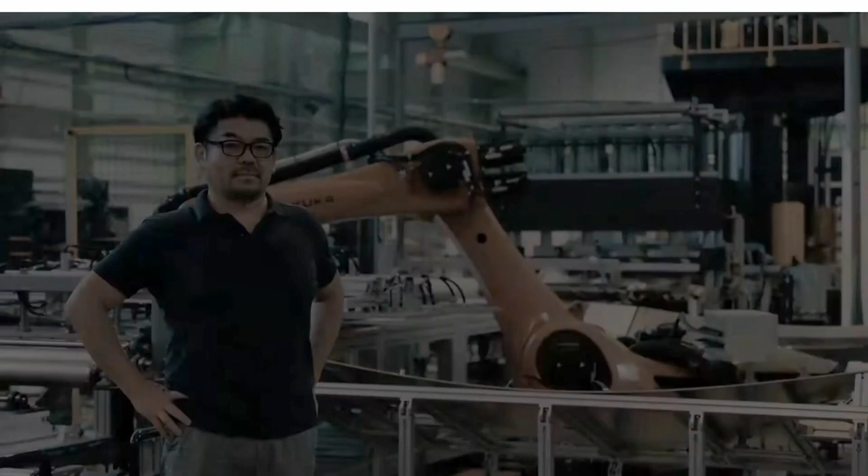This is a factory of MaruHachi in the Fukui region. It's a tradition of 3 generations, starting with the textile industry. In 1936, you will see here this young CEO, Toshi SUGAHARA, who took over a textile operation and is one of the pioneers in Japan for thermoplastic, but also for thermoset prepregs.

You see early on fabrication and knitting with glass fiber and carbon fiber, and now moving into thermoplastic composites. The CEO, Toshi SUGAHARA, will explain this in detail in a minute.

Okay, so I'd like to welcome Toshi SUGAHARA, the CEO of MaruHachi, who will give an insight of the family background. He's in the 3rd generation. The company started in 1936. He took over from his grandfather in 2018 as CEO.

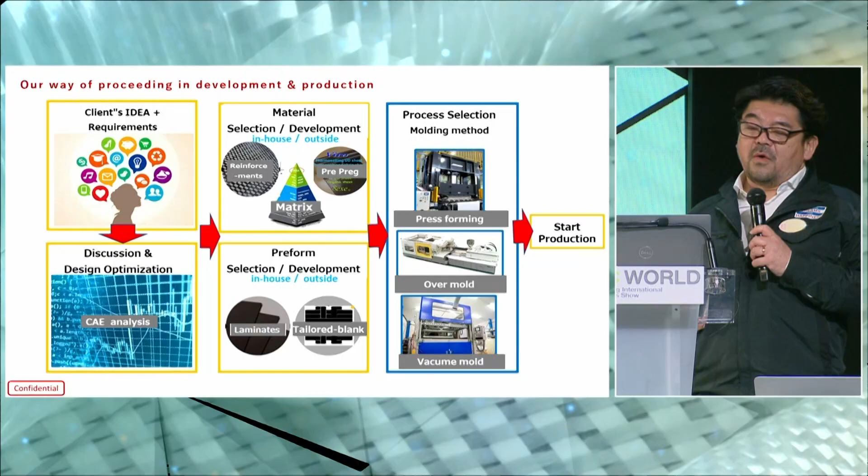Now, I'd like to introduce our way of proceeding in development and production in composite. So this is already you know very well, but I like to explain our flow of how we work with how we start the development and the production.

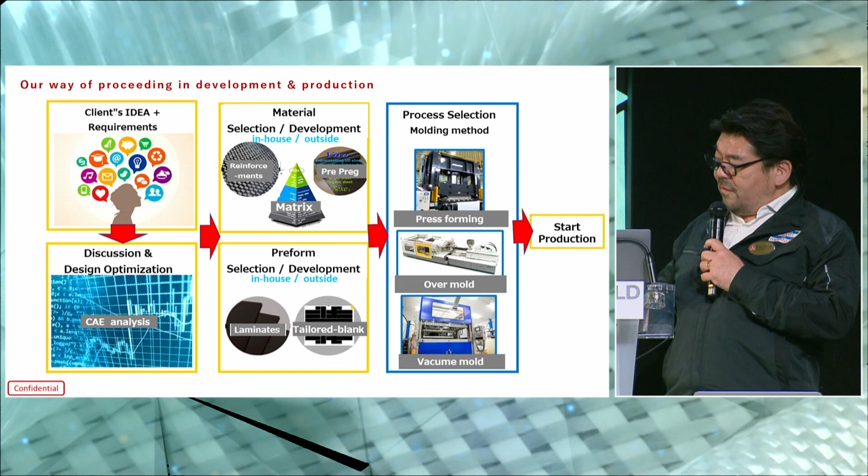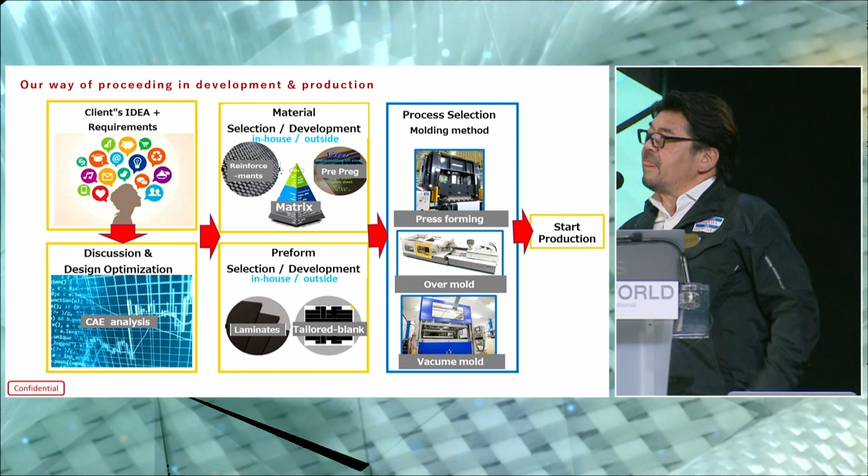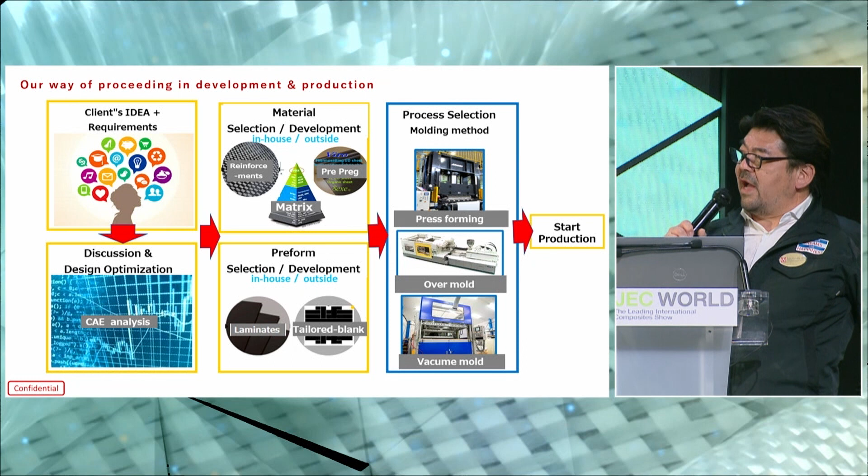Firstly, we get the client idea and requirements to think about. Then after that, we will discuss and also make some design optimization. Then we will come to the material to select, or if we don't have it, then we will develop. It could be sometimes in-house or outside.

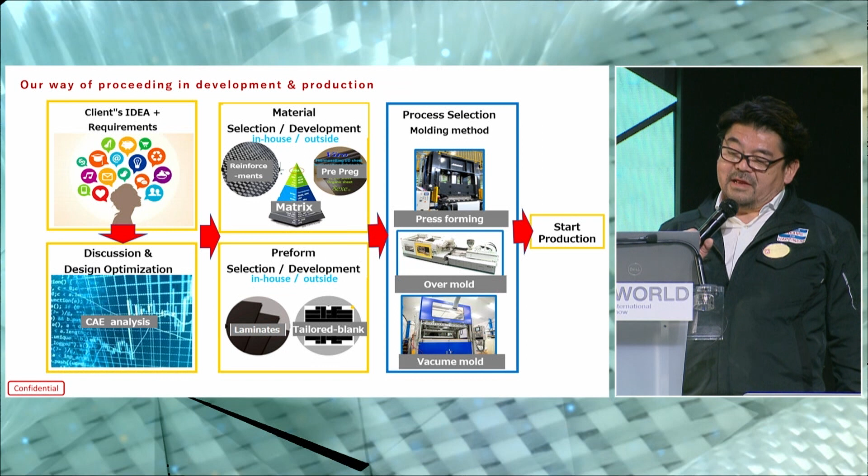And also preform, also select or develop in-house and outside. Then finally, we select the process from the lots of candidates. Then finally, we start production. This is how we work in the composite flows.

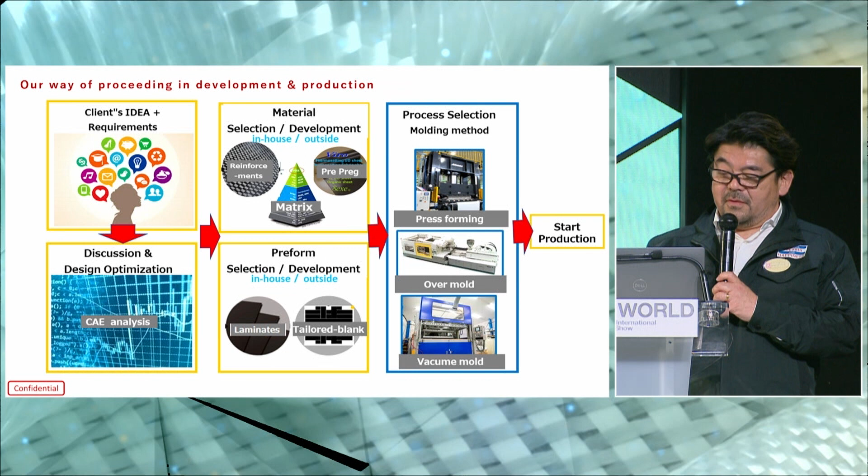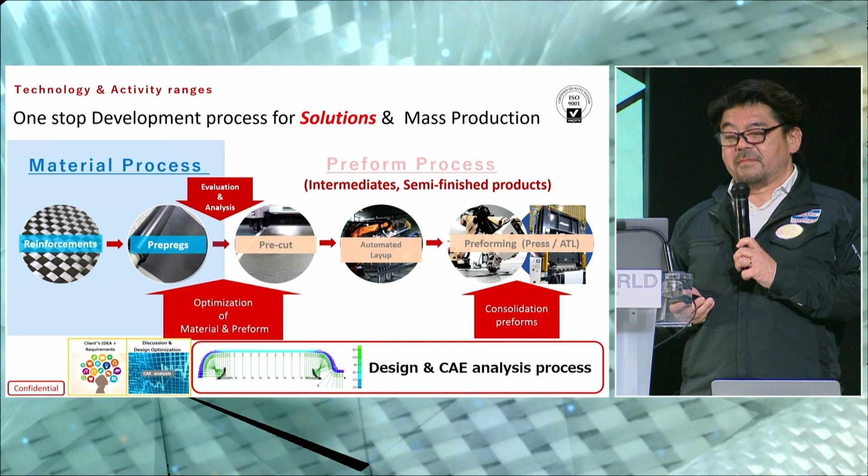Especially in this flow, we have 3 processes: design and analysis process, material process, and preform process. So I'll go into a little bit more detailed introduction of these three processes.

We have the CAE analysis process with the experience from the high pressure vessel, as we had the JEC award in 2014. So it's more than 10 years we have been working on the CAE analysis. And also material process, we have the ability of the reinforcement and also prepregs. Then we will make the evaluations and analysis on the material.

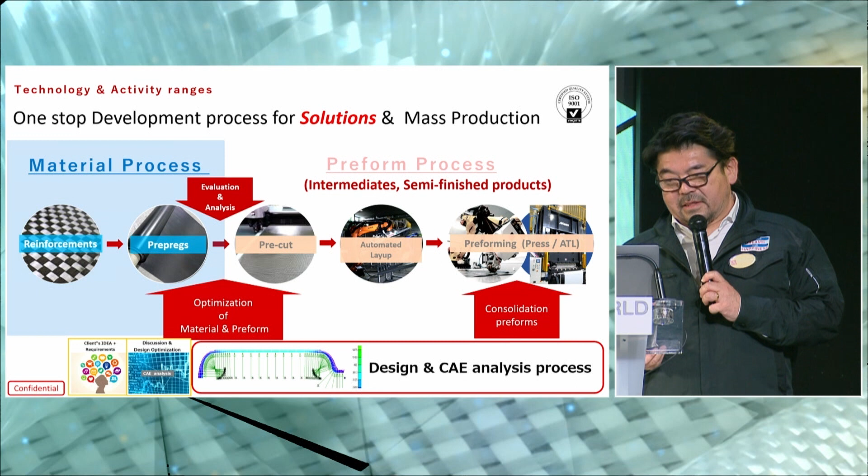Then preform, for example, like laminates or tailor blank. That's what we do. So it's like there is a one-stop development process. And then finally, we have also set up the ability for mass production.

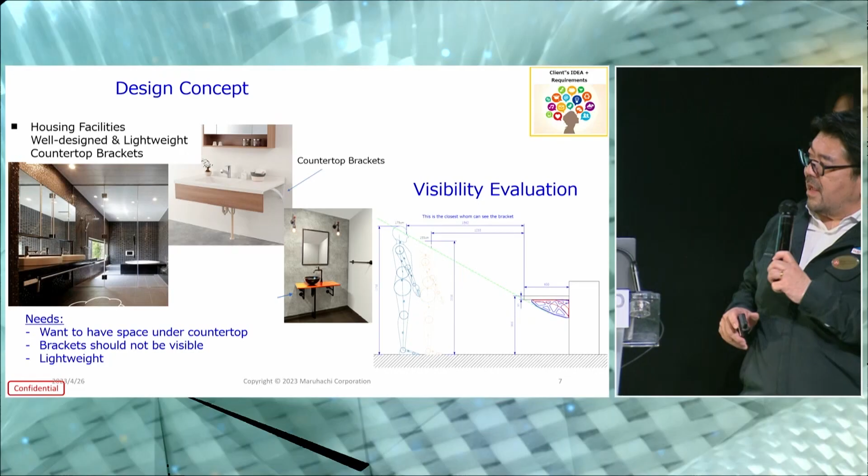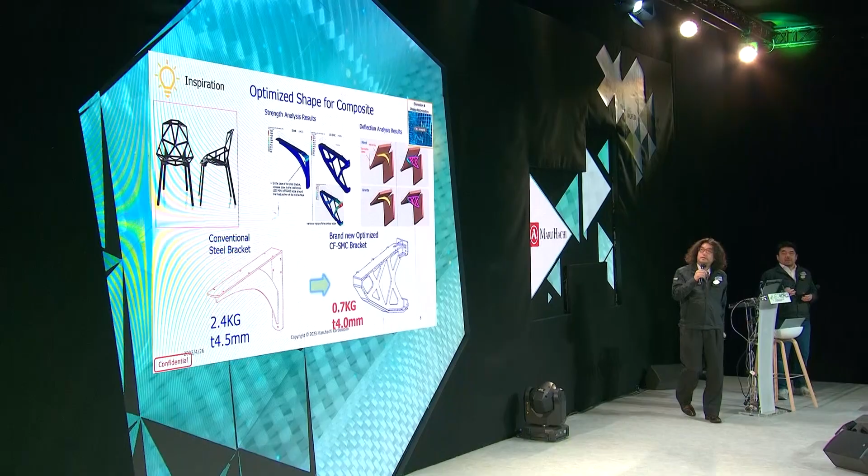Yes, here my colleague will explain this. Okay, my name is Hiro, R&D section manager of MaruHachi.

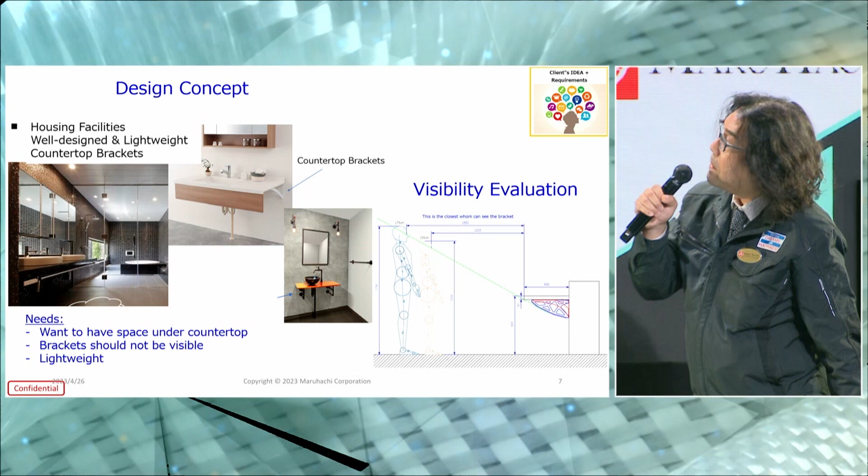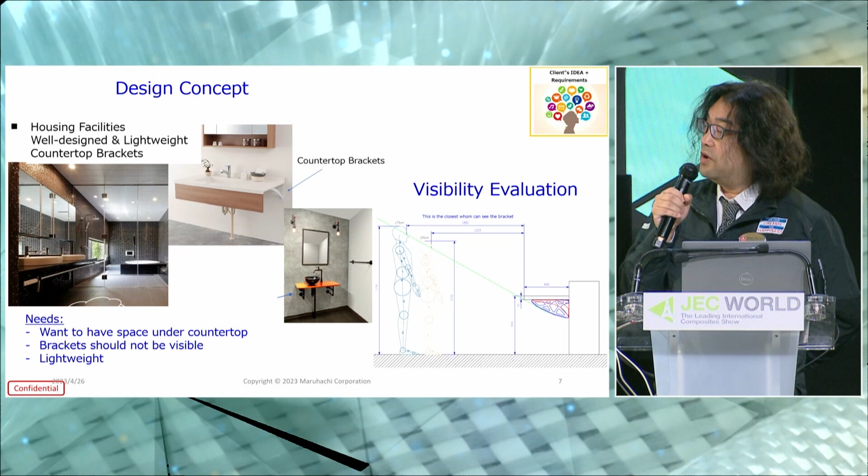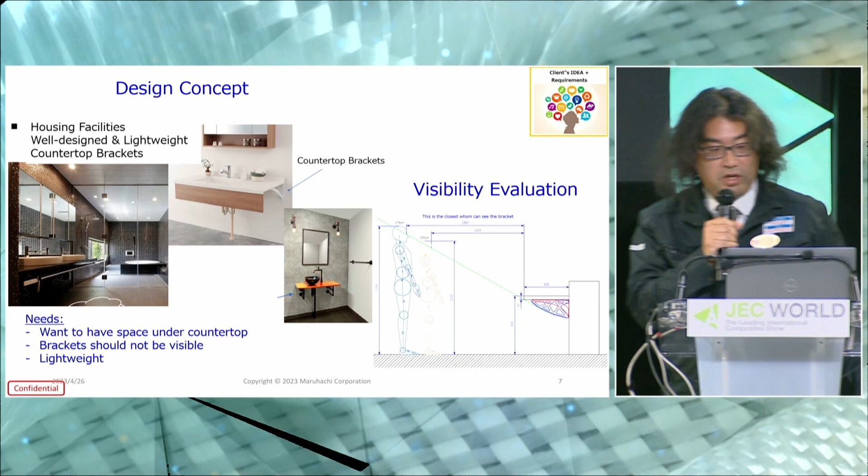First, we start the composite design based on CAE analysis. So to make the composite parts, in this case, we are making housing facilities, countertop, bracket. So customer needs here are to have a space under the countertop.

The bracket should not be visible, with the lightweight. So we evaluate visibility by CAE. We also analyze mechanical behavior by CAE, and optimize the shape of the composite parts.

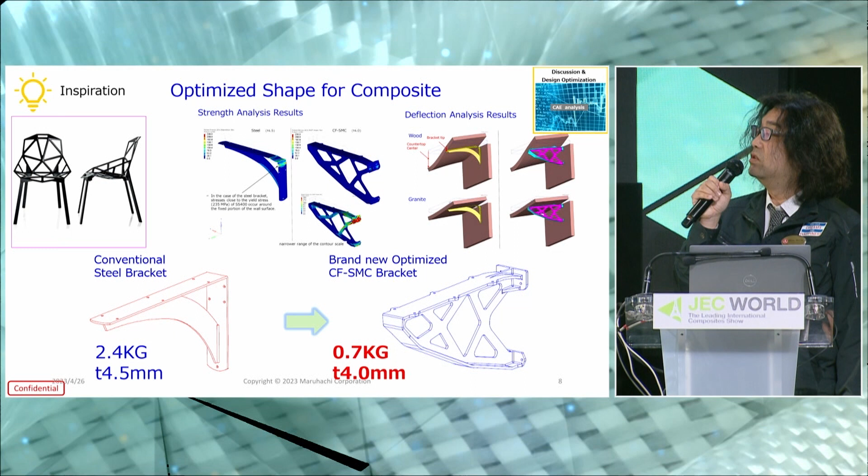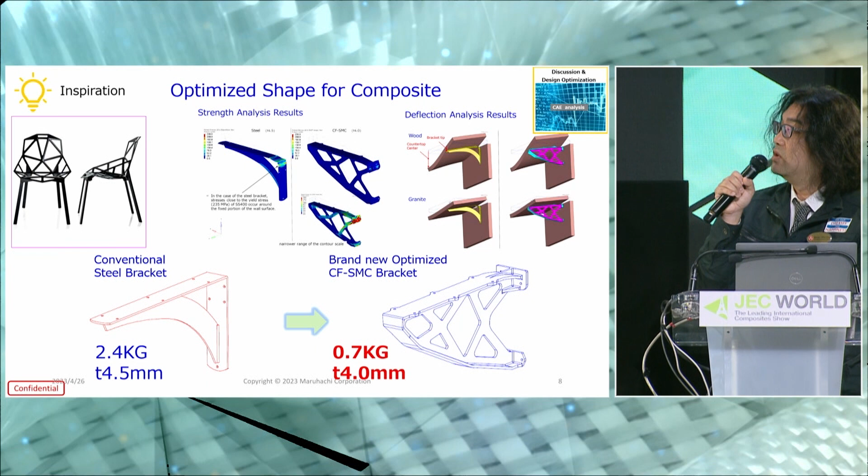This is the bracket. So finally, we can suggest how to make the material, preforms, and molding process overall, to fit the spec of customers. So we are ready to discuss and develop composite parts together with you. Yes, just change to Toshi.

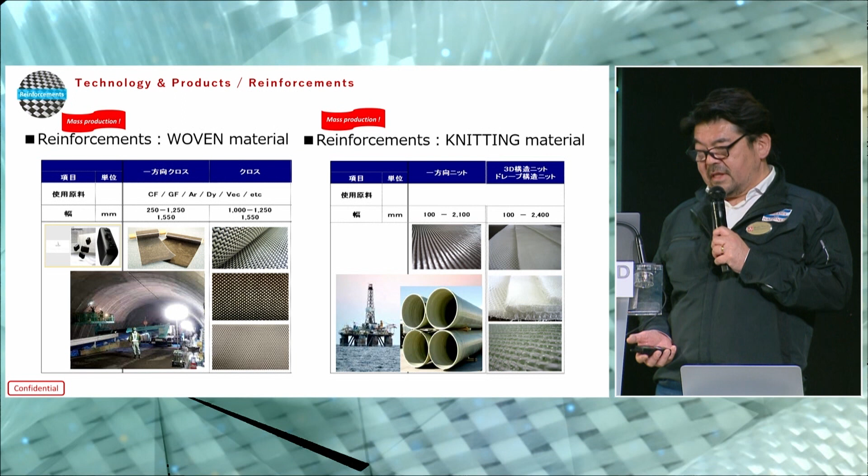Okay, thank you. So, back to our process explanation. As we said, we have the material process of the reinforcement. So in reinforcement, we have two sections, one is woven and another is knitting. So we have the woven fabric capacity and also the knitting fabric capacity for reinforcement.

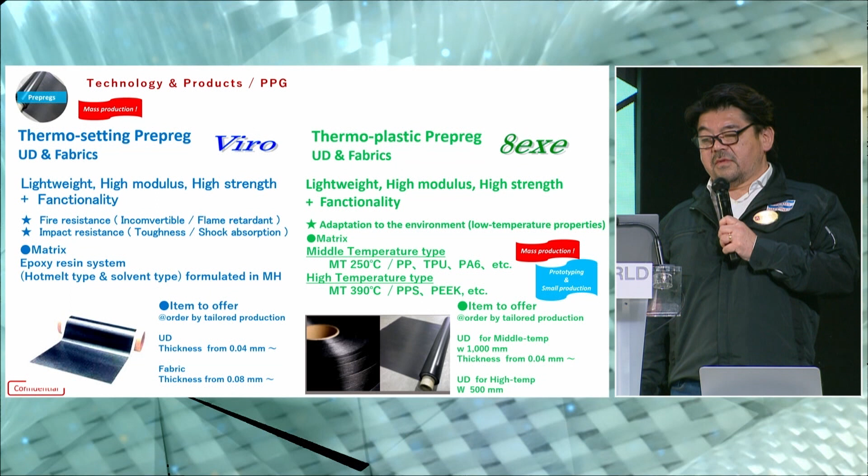And also in prepregs, we produce thermosetting prepregs and thermoplastic prepregs. In case of the European market, we really like to introduce our thermoplastic prepreg, what we call 8exe - it seems very hard to pronounce, but that's our brand. We also have two types of the thermoplastic prepreg divided by the matrix: middle temperature, like engineering plastics matrix, and also high temperature type for PPS and PEEK.

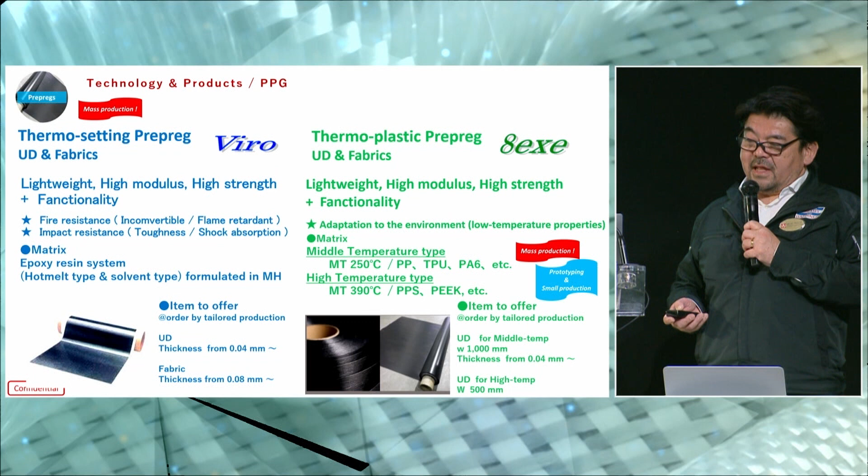So we have two kinds of unidirectional prepreg tapes or sheets. In case of middle temperature, we have the maximum width of 1 meter, which is quite big, and also continuous length up to 500 meters or 1,000 meters. Okay, so this is our material process. Then I'll pass it again to my colleague Hiro.

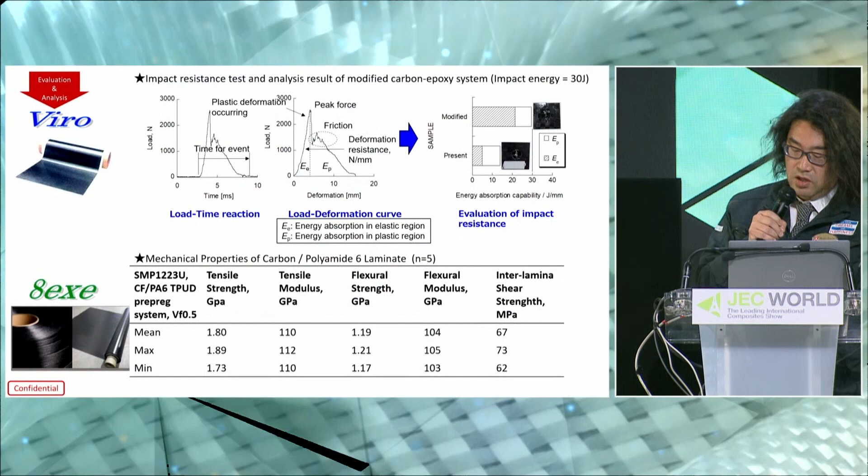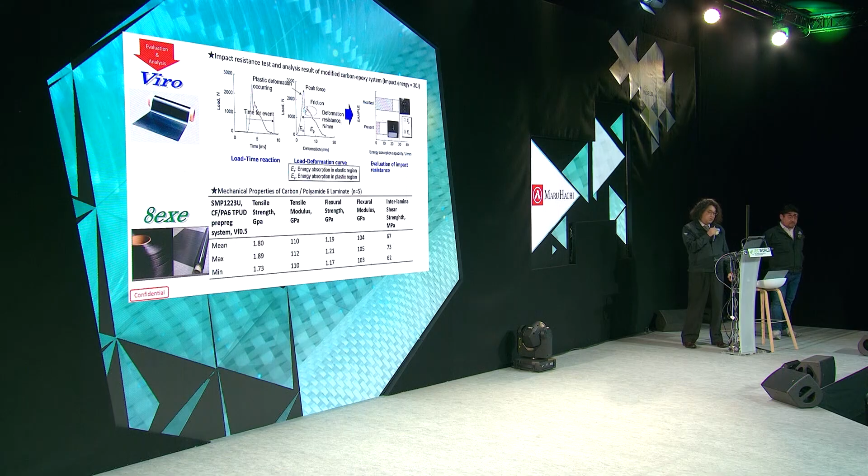We can evaluate any behavior of composite parts in-house. So in case of Viro, you can see the upper figure shows about impact resistance of the composite. We are checking for the functional availability of composite laminate. For example, you can see the result of our modified material - it has a higher impact resistance, you can see that.

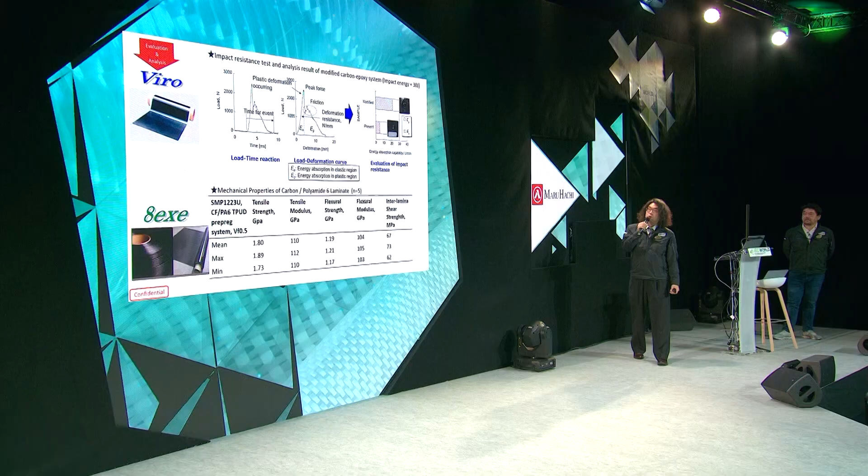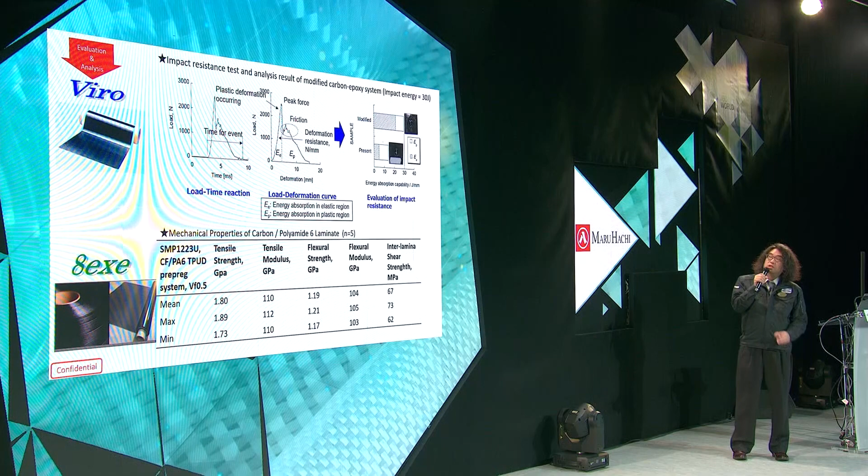In case of 8exe, we also check the mechanical properties through mechanical testing in-house. We check the quality of laminate. So our team is able to discuss everywhere about hypothesis, the mechanism, and etc. regarding this quality or behavior. So, the evaluation of the properties was with you, sir. Okay.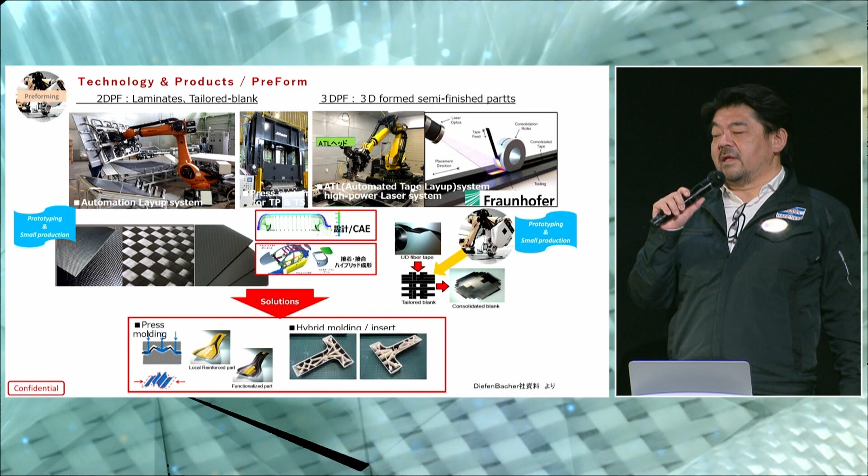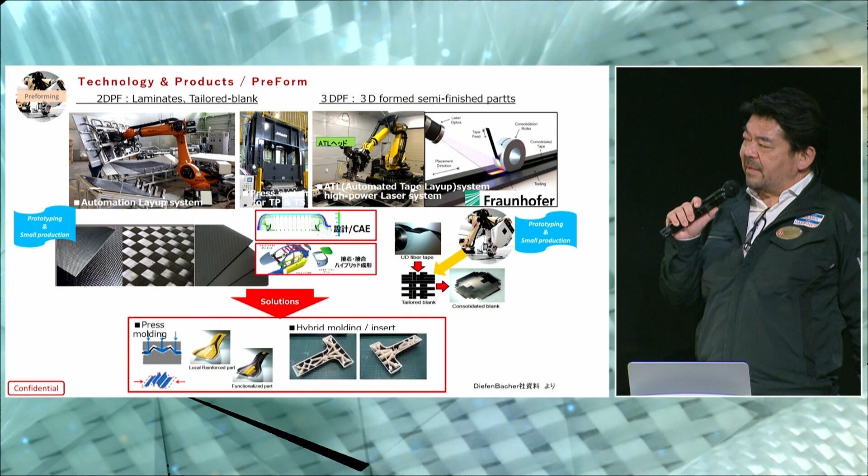As the preform, we mainly produce laminates of unidirectional layups and also fabric layups. They are also using the tape layup method to make the tailored blank for final items, which is made by our client or in collaboration with our client. Okay.

Then we have decided to invest - I mean, we started investment for this preform process up to mass production. So our capability of the auto layup system is, for example, 1.3 square meters of laminates with 200,000 pieces per year. Also, we have the multiple press system, which has the same capability of 1.3 square meters with 200,000 laminates per year. And also we have the NDI system and water jet cutting for cutting of the materials.

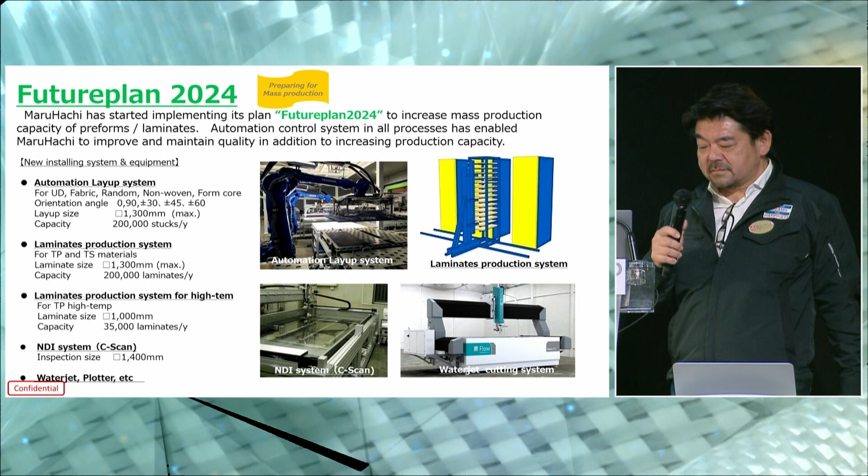Okay, so now we have the ability of one-stop development and also mass production capability. And yes, that's what I really like to introduce regarding our capability. Yes, so this is the final page.

Thank you very much, Toshi, for the presentation, and also to you, Hiro. I think the key message here is there are new capabilities in Japan making tape-based material and also tape-based laminates on high-performance polymers: PEEK, PEI, PPS. I think you have probed the market in Europe for polyamides and polypropylene, but this is not, let's say, a value proposition of making products in Japan and shipping them to Europe. So you're focusing on producing these parts and elements in Japan.

Yes, in Japan at the moment, yes. And what are the key markets that you are targeting? So we will start with the sports and leisure market firstly, then move into the more industrialized applications.

Okay, very good. Are there any questions in the audience? Okay, maybe if there are no questions, a final question from my side: when do you think this will be in full production for maybe a sporting good application? Is it already next year? Yes, actually we will complete our installation by end of this year. Then we will take some trials, and testing time is like 1 to 2 years. So maybe in 2025 to 6, we will start the production.